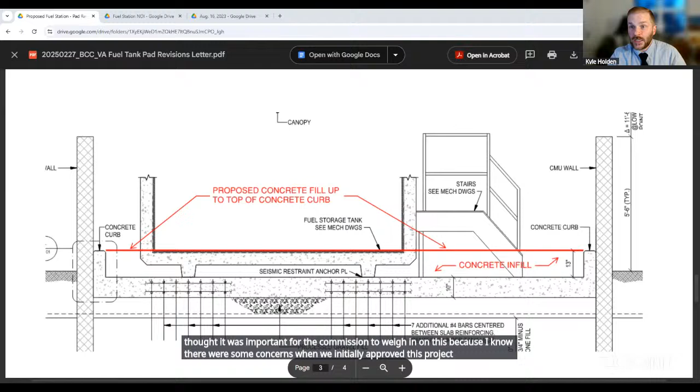So my last statement is, when Beta did their review, Beta was not reviewing really outside of that comment that Mr. Lynch mentioned at the beginning. Beta's not really reviewing to make sure that all the fuel handling regulations have been met. That's kind of beyond the scope of the review that Beta did for the commission. Apparently they did ask for some extra, the emergency shut off and things like that, and the sump was added in response to Beta's comments. But I thought it was important for the commission to weigh in on this, because there were some concerns when we initially approved this project because of the proximity of the fuel tanks to the wetland resource area. That's all I've got for now.

You said it is within the buffer zone. Do you know how? I've got the plan of record here. Are you able to see this plan as I'm scrolling through? The wetland is down here marked by these triangle flags. We have the 25-foot, 50-foot buffer zone. This is where the fuel tank is, so it lies between the 50 and 100-foot. The drive is between the fuel tank and the grass retention area, and there's a retention basin over here. There's 50 feet of buffer between the tank and the wetland.

Is there any concern—if that was a recessed area and there was concern about water filling it or gas getting in there—what's to prevent the water and gas from just sheet flowing off, since you don't have that sump area? That sump would be only for emergency spills, is my understanding. It's not designed to capture any gas from incidental leakage when you're filling your tank. This is kind of a catastrophic backup, is what the sump is for, is my understanding.

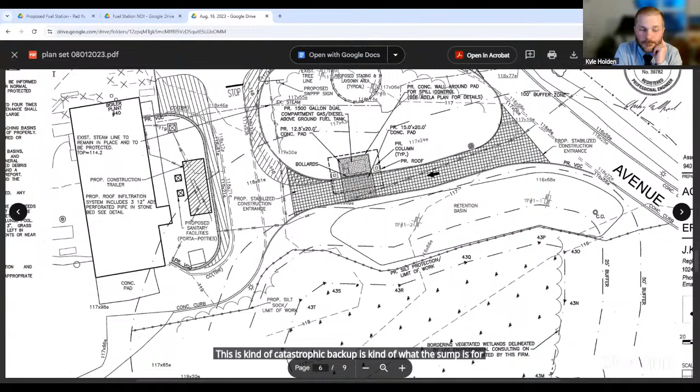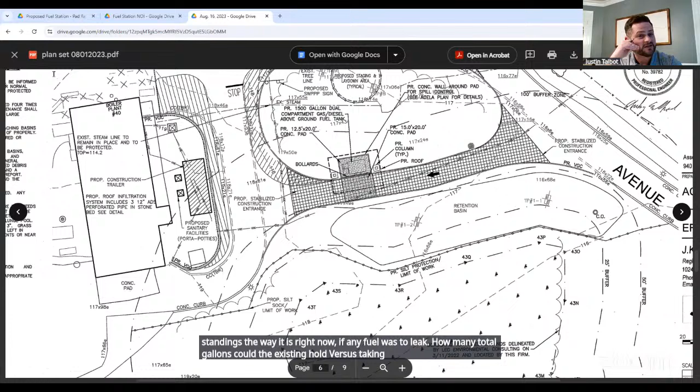Justin, you had your hand up? I did, Madam Chairman, if I may ask a few questions to Dawn. Dawn, in the current standing, the way it is right now, if any fuel was to leak, how many total gallons could the existing setup hold versus taking the other two 750-gallon tanks and putting them on your new proposed design with your grooves? How many gallons could that contain?

Well, it would contain anything that leaked. It's like having a container within a container. So let me ask the question: you have, let's say, 1,500 gallons between diesel and gas, and you have a 750-gallon leak. I'm assuming the current tank's catch basin isn't going to hold 750 gallons below the tank, right? I think the question is, what's the volume storage of the sump area that's being proposed to be filled with concrete? Correct, the sump area. Got it. Yes, that is designed to hold the entire contents of both fuel tanks, in total.

Then how about the volume—what would the volume be on the new proposed slab with your grooves? Well, minimal, it is strictly for small spills. The containment is a double wall tank, so if there was a hole or a breach of the inner tank, the outer tank would contain everything that's within that fuel tank. So what we're looking at is a secondary containment. Okay, understood. Thank you. You're welcome.

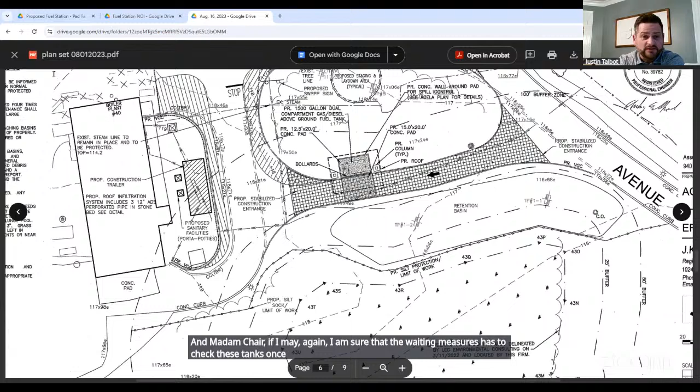Madam Chair, if I may, I am sure that weights and measures has to check these tanks once or twice a year. I am sure that weights and measures for the city has to go out and look at these tanks and confirm they're dispensing what they're supposed to be dispensing.

Mr. Lynch, do you know if, because it's a VA facility, the city would still go out? I don't know if the city would still go out, but I do know that there are monthly inspections on this internally from the VA.

I wanted to ask if the construction of the tank is something new that eliminates the need for the bathtub. Or was that bathtub standard years ago, and now it's not necessary because the newer construction of these gas tanks eliminates the need for it?

Yes, if it was not a dual walled tank, you would definitely need it. But we do have the containment of the secondary shell of the fuel tank.

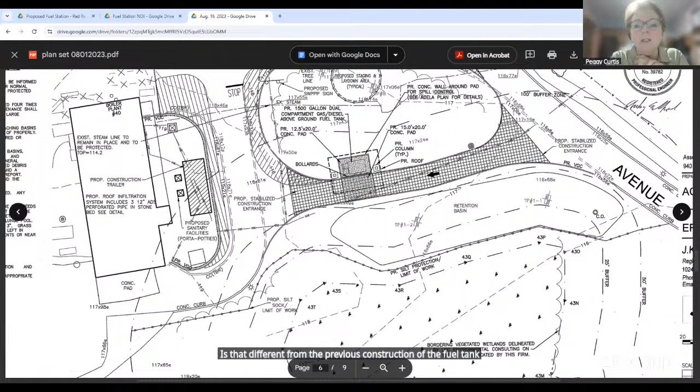Is that different from the previous construction of the fuel tanks that were existing? I can't really speak for that, but generally speaking, other fuel tanks are underground. It's not real often that you have an above ground fuel tank.

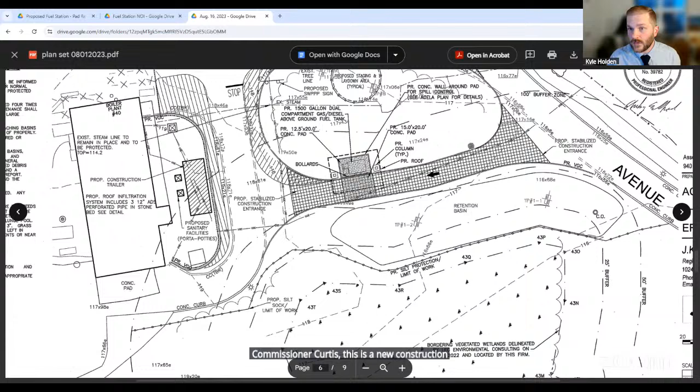Commissioner Curtis, this is new construction, so there weren't existing tanks at this site. Oh, yes, okay, I'm sorry, I think I mistook your question. Actually, there were some underground fuel tanks here that were removed and replaced with this. Thank you, yes, but they were underground.

Well, this is a commission matter, but not for a vote, so I'm not sure, Kyle. Yeah, so we were just hoping to get some guidance as to how the commission feels we should proceed with this. Even if we don't necessarily say the applicant needs to file an amended order, we can take a month, and now that we've seen this, if there's specific information the commission wants me to look into, I can certainly do that before next month's meeting. Or if the commission decides this is something we can just sign off on the certificate of compliance request, that's also fine. We just need to offer some guidance or decide on what additional information we would like to know as the commission, that I can work on before the April meeting.

Well, I'd like to know how long it takes to fill it and when is the optimal time to do it. You mean as far as filling the bathtub with concrete? Yes.

Mr. Lynch may have something to say. Well, this project is under construction right now, and the contractor is looking to do it as soon as possible. And just to clarify the point, the tanks and that sump have already been installed per the approved design. They've noticed some issues with that, and they're looking to maybe just fill that void space with concrete now. So everything's already in place, is my understanding.

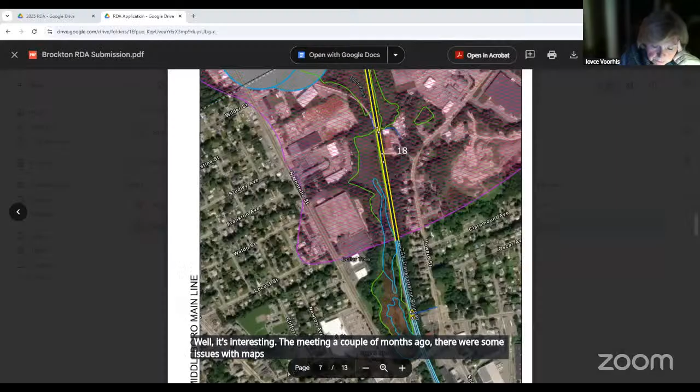Let's just talk through these maps very briefly. What you see here is the Avon town line at the north side. This is a color-coded map. The rail line is this set of parallel lines going north-south, top to bottom through the page. They have various color coding corresponding to different types of treatment based on how sensitive that area is in terms of proximity to protected resource areas.

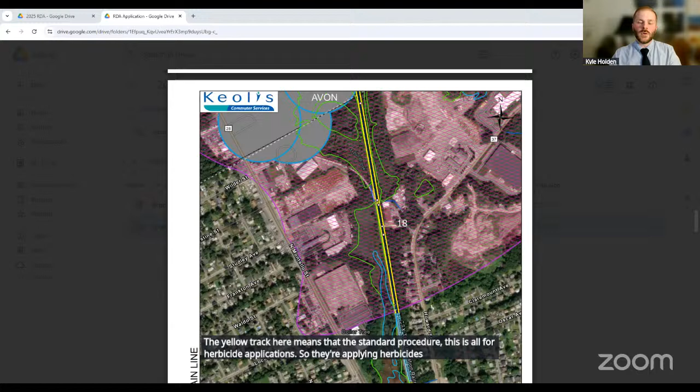There's a key at the bottom of each map so we can look at what those colors mean. In general, the yellow track means standard procedure—this is all for herbicide application. They're applying herbicides both to the rail line and the riprap that constitutes the foundation of that rail line, and also along the side to keep vegetation at bay. The area in yellow has a lot of other colors happening too, meaning there's a lot going on with wetlands and open water bodies and things like that.

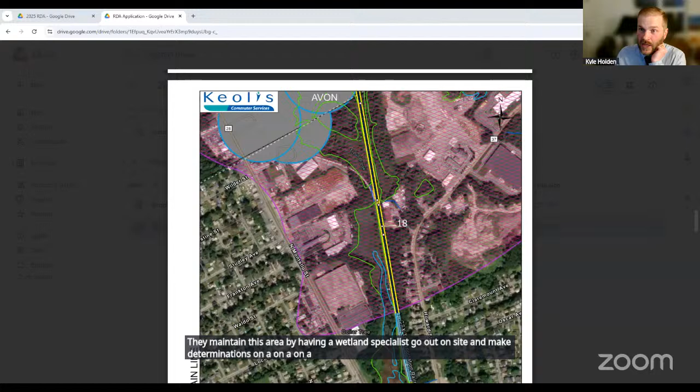This pink hatched area means that this area is significant to drinking water or groundwater. Anything within this area is yellow, meaning there is no herbicide application in that area at all. They maintain this area by having a wetland specialist go out on site and make determinations on a plant by plant, case by case basis. So this is the least amount of treatment. This yellow is the most restrictive as far as what's allowed in that area.

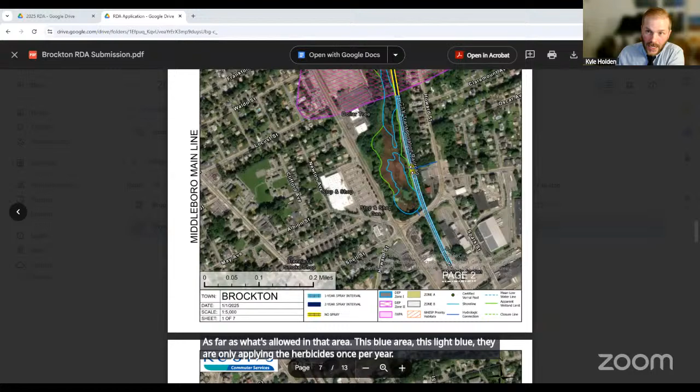This light blue area is where they are only applying the herbicides once per year. Areas farther down, I'm just going to scroll through several maps so we can see some different things. This segment of the rail has no color coding, meaning they just do the standard application through this whole section. It just kind of continues. We're just going south through the city now.

This is a waterway, open water, and it crosses the rail line. You'll see here there's a section right around where the track goes over that water body where there are no herbicide applications permitted. But on either side, they have a less frequently applied area, kind of in the buffer area.

There were some things I noted, and I included this in my agent report, on maps 6 and 7. There are two areas I noted where there seems to be an open water body that crosses the rail line, but it didn't have that yellow area. I spoke to Matt about this on Monday, and he said this is pretty standard when there's a culvert that conveys the water underneath the line.

So there's no actual open water at this point on the rail line. They have the limited application once yearly, but they don't have that yellow no-herbicide-applied-at-all designation because there's no open water. It's standard procedure for them: if there is open water within 22 feet of either side of the line, they don't apply those herbicides in the area. That's a yellow area.

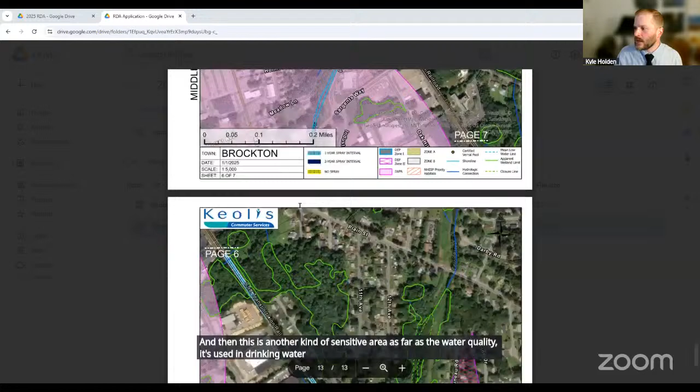Then this is another kind of sensitive area as far as water quality, used in drinking water or sensitive things like that. There are a couple other things here on map 7 where there are some water conveyances that are also culverted, so they don't have that no-application treatment there.

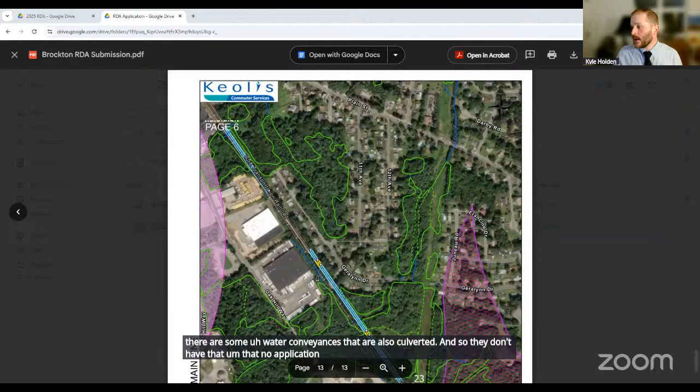This area at the very end, which is not even in Brockton but in West Bridgewater, this dark navy is a more limited restriction of application time. So the light blue is once a year, and then the blue down here is only once every two years. So it's a little bit more restrictive.

But yeah, these are the same maps that were approved last time, in 2020. So I'm comfortable issuing the determination, issuing a 2A, confirming a positive 2A, confirming the maps, and then a negative 5, which would state that the proposed work is exempt under the act. This RDA would be valid for 5 years, so they would come back to the commission in 2030.

Commissioners, any comments or questions? Did you mean 2020, not 2000, when you said the maps were from? You meant these ones are the ones from 2020, not 2000 — misspoke? Okay, these are the maps that were confirmed in 2020. That is correct — 5 years ago, not 25 years ago.

Do you know if the maps confirmed in 2020 are based off of maps from 2015, or is there a review between the 2015 and 2020 maps? I'm not sure when the last review was. A lot of these data layers are based on... I'm not sure how often they're updated, but the maps we have now are the same ones approved in 2020.

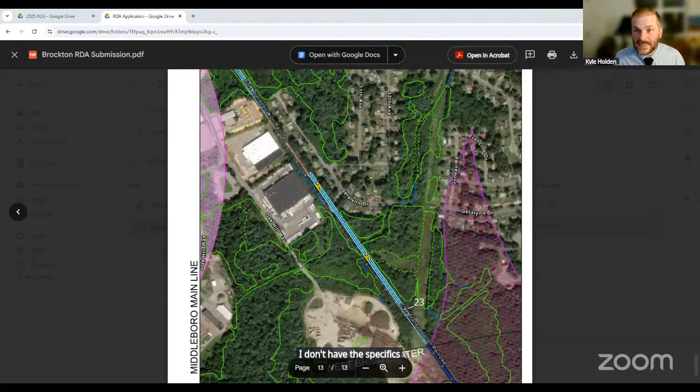What kind of herbicide is being used? I don't have the specifics on the specific chemical that's being applied. It may be buried in the narrative, but it's not something I remember offhand. Don't recall seeing it.

And then just another comment — they've got to apply these herbicides using best management practices as well. So there's a whole subset of regulations that they have to abide by in order to meet that exempt status. There are all sorts of regulations they have to maintain and abide by to be considered an exempt activity.

And you mentioned they've already gone, or are going, before other commissions. Yeah, I think that's why Mr. Donovan had to leave a little early today. He had another commission meeting at 7:30 this evening. So I think he just left because he's attending several of these, not because of a technical issue.

I thought I heard mention of a rain garden along the way. It really was surprising to me to see how much wetland there really is along the way. And it's comforting to know that they take those additional steps.

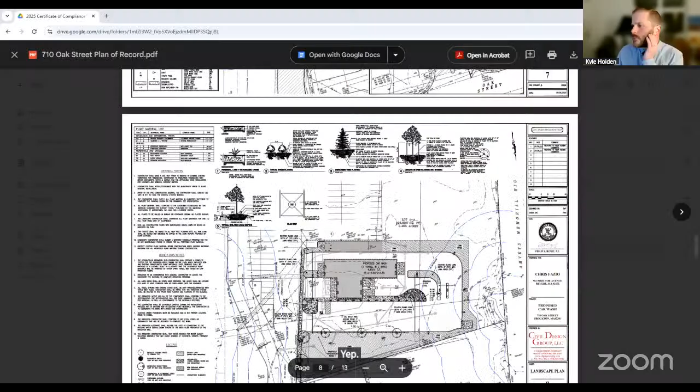Okay, I'm looking at page 8. This is the landscape plan.

So this is the plan of record, and the car wash is in this portion of the lot. The entire lot for the property is actually this much larger trapezoid shape over here, and the car wash is only in a small section of it. This is an existing parking lot that is remaining in place.

And then this is kind of a meadow grass area, kind of weedy, that was open before. This is where the car wash was installed. There's a retention basin down here.

The limit of work is where the erosion controls were installed around the perimeter of the work site, and that's this dashed line here. It goes up to this corner, cuts down here, and circles around this portion, which is where the dumpster goes.

I like this map because it also shows the pre-existing elevations of the site. That's what these lines are through the parking area. This is just the approved plan set.

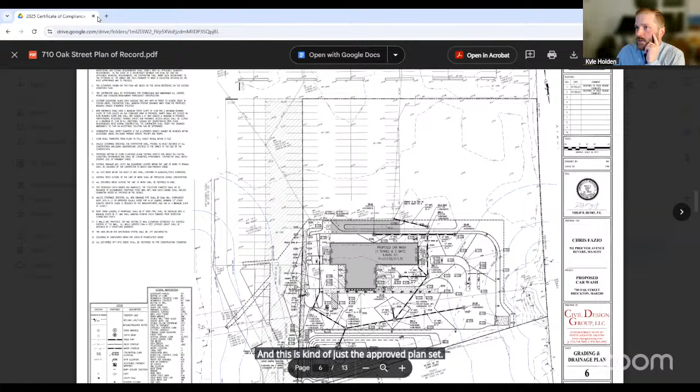I'm going to pull up... very quickly, can you—I can't see, must be my old eyes—but do you have any idea what the elevation is right smack in the middle there? You mean right here? Yeah. That's 213. Okay, and it's fairly flat.

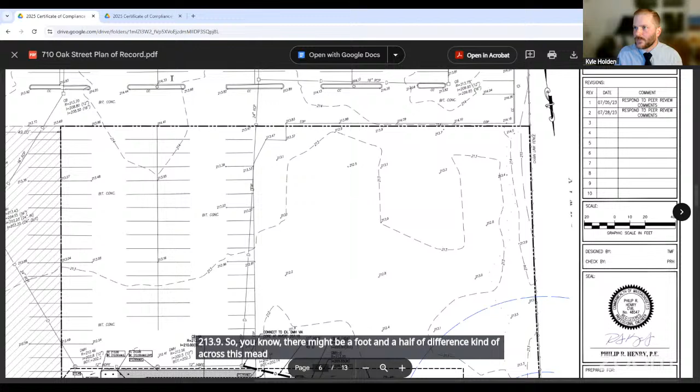This is the meadow area. I've got 213.1, 212, 213.9, so there might be a foot and a half of difference across this meadow, but it's a fairly flat surface. I am going to pull up the as-built, and then we'll look at some site photos.

So here's the as-built, and I don't really have any problem with it, outside of the grass needing some more time to get established, within the confines of the area where the work was done around the car wash, as far as work within the limit of work.

But the thing I noted when I was out on the site is that this portion of the site, this meadow, has had significant grading changes. A lot of fill has been added. The topography of this meadow has been altered significantly, including—you'll see here.

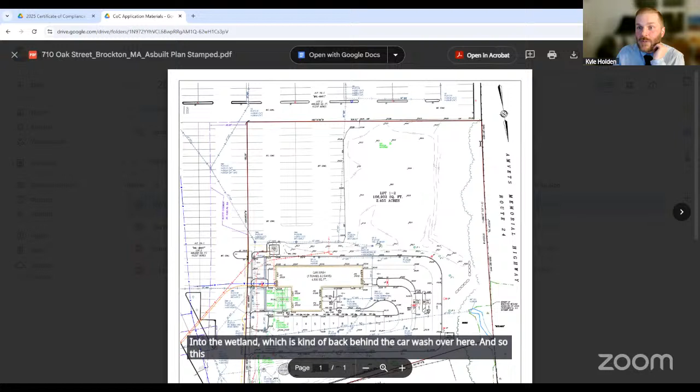There are two swales up against the wooded lot line here, like a water conveyance, almost like a channel that's been dug through here, which looks designed to deposit any runoff from this portion of the property into the wetland behind the car wash. This modification was not reviewed or approved by the commission and does not appear on the plan of record.

If there were plan revisions after the order of conditions was issued, the commission never reviewed or approved this work. So this work is in violation of the order of conditions.

I've got some site photos that I can share as well, just to give you a better idea of what things look like out there. Let's see.

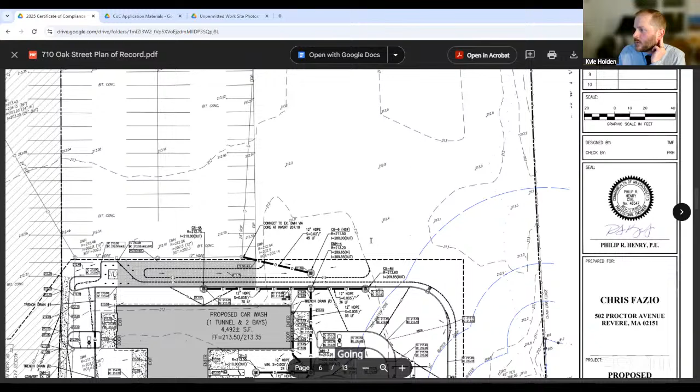Going briefly back to the plan of record: from that photo we were just looking at, I was standing around this portion, looking directly down the back of this, where the curbing would be. And you can see there are some lights here.

So the point is, you can see that the limit of work approved on the plan of record is just several feet behind where that curbing was installed, whereas we have obvious disturbance dozens of feet back into the wetlands, just behind these rocks. So anything behind probably where these trees had been planted is also beyond the approved limit of work. That's the concern — a lot of work was done outside of what the commission had expected based upon the plans they had approved.

We never received word from the applicant at any point that they were doing work beyond the limit of work, which was marked by those erosion controls that were installed. Obviously, they're not installed anymore. At the pre-construction meeting, I walked the perimeter and confirmed those erosion controls were in place and approximately in the right location. So I'm not sure at what point work was done beyond that limit, but it's clear that work has been done.

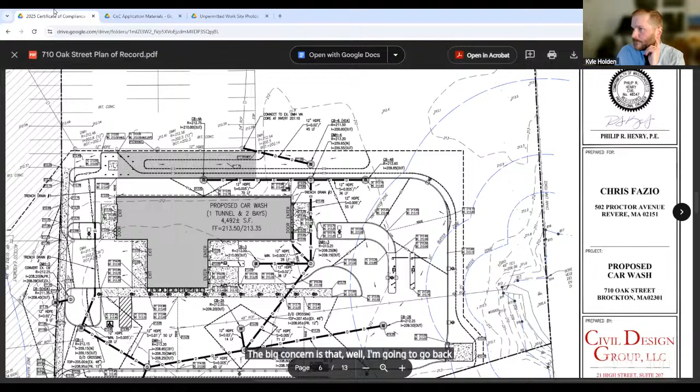The big concern is — I'm going to go back to this. Here's the site plan, the approved site plan. You can see a majority of the area that's been disturbed is not within jurisdiction — it's outside of the 100-foot buffer zone, which is this line here.

But the concern is with that channel that's been installed — really, any water that's collecting through. Keep in mind, to the north above this shot is the entire parking lot for Walmart. It's got drainage, catch basins and things there. But any water that sheet flows off that Walmart parking lot, or off this portion of the parking lot and ends up here, will be conveyed down directly into that wetland.

That stormwater management was never reviewed by the commission, even though we did review the project for stormwater compliance with the stormwater standards. We only reviewed the work that was proposed and approved within the limit of work, just within this portion of the site.

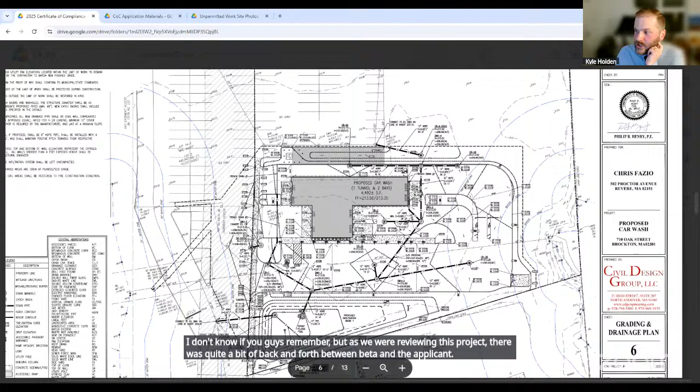I don't know if you guys remember, but as we were reviewing this project, there was quite a bit of back and forth between Beta and the applicant, trying to make sure this basin would meet the performance standards. And now we have just kind of an unpermitted outlet into the wetland, and I'm not sure what capacity that's designed for. If it is designed, does it meet the standards or not? We just don't know.

So at this point, I'm not recommending that the commission issue the certificate of compliance due to the unpermitted changes beyond the limit of work. In addition, the commission needs to decide how we want to approach and rectify this situation. So, yes, Madam Chair, you have your hand raised.

I just have a very quick question — can you place on this map the approximate location of those boulders?

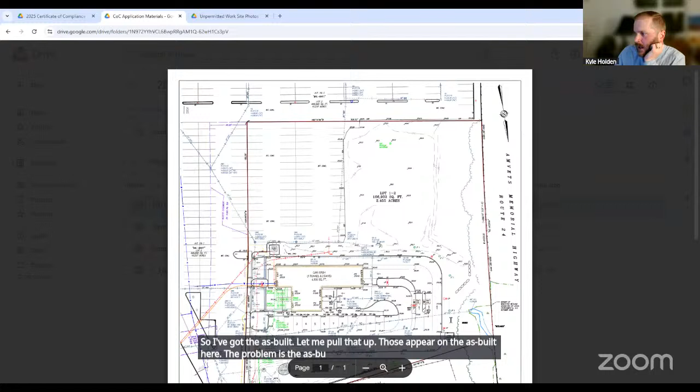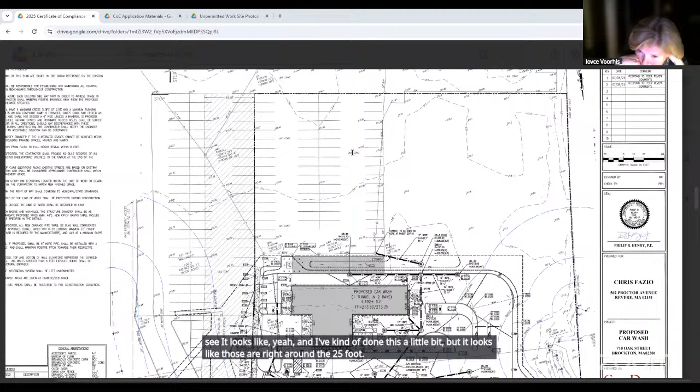So I've got the as-built, let me pull that up. Those appear on the as-built here. The problem is the as-built doesn't have the buffer zones on it, so it would be beneficial if we had that. It looked like, on the plan prior to that, it was within the 50, or within the 25 — I can flip back and forth. You can kind of see, really close, look where the 25 is. It looks like, yeah, I've kind of done this a little, but it looks like those are right around the 25-foot area. But again, we don't have that confirmed.

That conveyance is certainly within the buffer zone. Going back to the as-built here, the 50-foot or the 100-foot line kind of goes right through here. So again, a lot of that fill is placed outside of the buffer zone. That's not a problem in and of itself, but it appears this is designed to convey any water that collects here through this channel into the wetland, and that's the concern.

In my agent report, I recommended two possible solutions for the commission to consider. One is that the applicant, since this does look like it was designed on some level, could provide documentation showing this modification meets local and state stormwater standards. If they think they can demonstrate that, the commission can have one of their third-party consultants review it and confirm compliance with those standards.

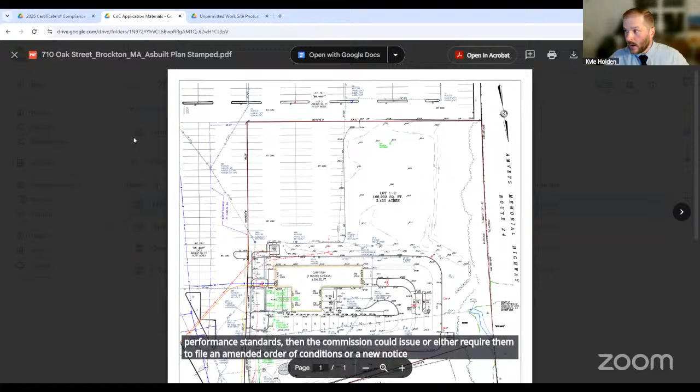If these unpermitted modifications do meet performance standards, the commission could require them to file an amended order of conditions or a new notice of intent for the work on this portion of the site. After that's resolved, they could come back and apply for a certificate of compliance for the car wash.

The second option is: we have the existing conditions map here, which is part of the approved plan set and has elevations. The commission could require that everything outside of the approved limit of work be returned to its original conditions as depicted on this existing conditions plan. Obviously the car wash wasn't existing, but the elevations outside the limit of work are the existing conditions.

The commission could require that all areas outside of the limit of work be returned to pre-existing conditions, and then all that area would be seeded with some sort of conservation mix just to stabilize it, because right now it's very bare. So that's kind of where we are.

If Mr. Clark wants to speak to this through the chair, I'm sure he'd like the opportunity. So that would entail submitting a remediation plan, is that correct? Yes, we would want to have something there. We would need more erosion controls at minimum put in before any more grading and earthwork around there. But yeah, that's kind of where we are.

Because this work was done outside of the limit of work, I think an enforcement order is something I would recommend. We can issue that this month. We can talk about it first and figure out how we want to manage this, but this is significant enough that I think an enforcement order is warranted.

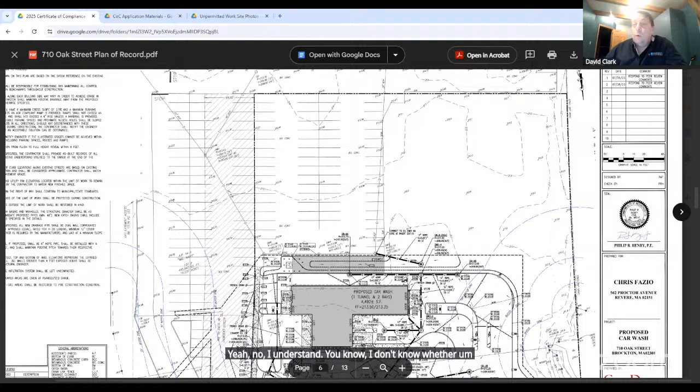Mr. Clark? Yeah, no, I understand. I don't know where it went south as far as the permitting went. I'm the general contractor working on the project. I'm certainly going to reach out to the owner and engineer who I thought was going to be involved in this, but I'll definitely find out why I received, as part of my building set, a plan that wasn't approved by your commission.

We'll certainly do whatever it takes. It was designed on our plan - it says it's a peer reviewed planning board revision, to respond to peer review comments and planning board conditions. Not to make an excuse, and you're going to do what you got to do as far as putting an order out there, but I think we can hopefully get the engineer to show why that was designed like that. That was a rather large addition of work for us, so I certainly wouldn't have endeavored to do that if it wasn't the case.

And just so you know, really the boulders were not part of that design. We were having a lot of problems on that site with trucks backing down and dumping on that site.

It's a pretty notorious dump site up there. We had to remove quite a bit of materials that we weren't planning on running into up there. So that was the purpose of the rocks, because people were backing all the way up to the wetlands back there.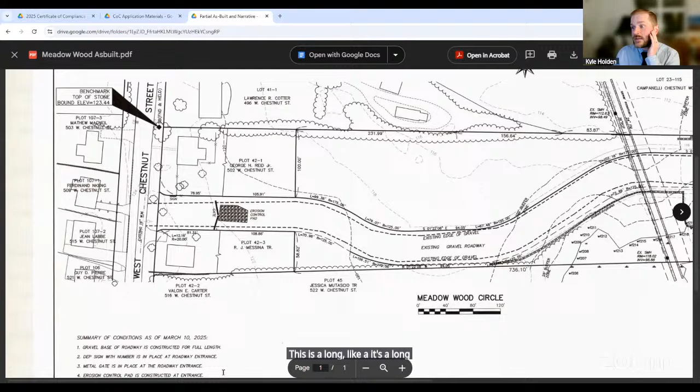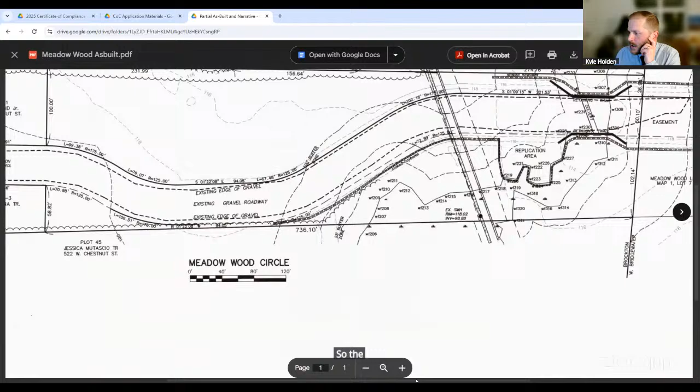I'll open up the submitted as-built and the project narrative. So, let's see here. All right, in the notice of violation letter—you know, this is a physically long site. The wetland delineation, the wetlands are kind of... I'm not even sure what cardinal direction this is, but it looks like the south portion of the site. So the wetlands are all the way over here. Again, this is the as-built that was submitted to the commission.

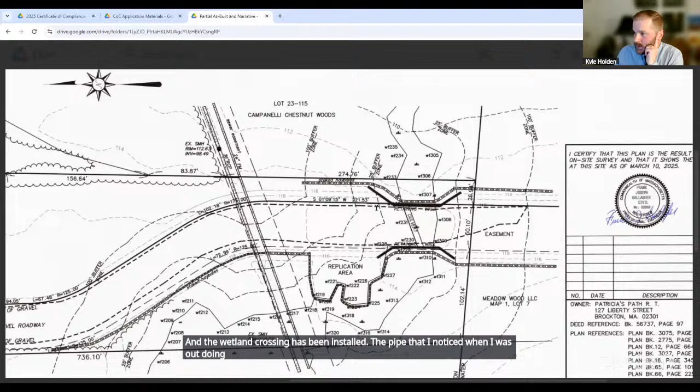The order of conditions was for the installation of a wetland crossing, which is what you see here. Because there was direct impact on the wetland resource area, there's a wetland replication area over in this portion of the site that has been planted, and the wetland crossing has been installed. The pipe I noticed during my site visit is on this portion of the wing wall of the wetland crossing, and it does not appear on the as-built plan. So in our notice of violation letter, I asked the applicant and Frank, the engineer on the project, to give special attention to that pipe and what it's connected to, if anything, and to give us a rundown of why it was installed.

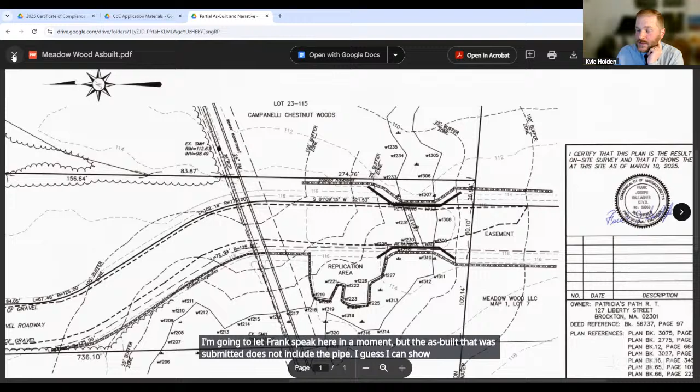I'm going to let Frank speak in a moment, but the as-built that was submitted does not include the pipe. I can show some photos I took when I was out on the site—these were taken on January 3rd of this year, 2025. This is the wetland replication area. You can see some standing water back here, but it's been seeded, and there are trees and things planted through here. Here's another shot of the wetland replication.

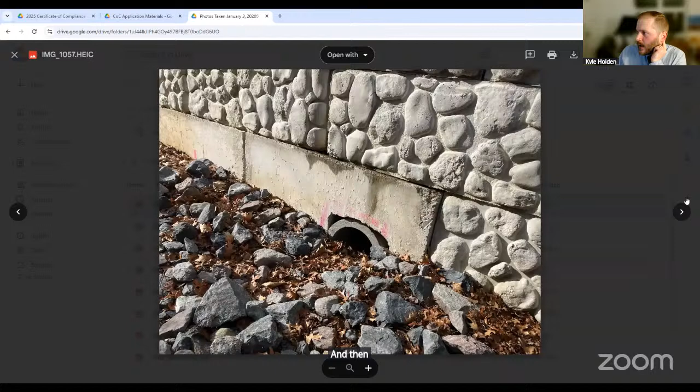This is the pipe in question—there's a pipe here, some riprap outside the pipe, and this is in that wing wall. Here's another shot: the pipe is here, and that's the wing wall. This is the box culvert. So I guess that's really it—the pipe's there, this is the wetland crossing, looking back towards West Chestnut Street all the way over here. Is the box culvert under the crossing? Yeah, the box culvert connects the left side of this image to the right side.

So anyway, the commission's concern is: what is this pipe? What's it connected to? Why was it installed? Because it did not appear on the plan of record. That's kind of where we are now. Through the chair, Madam Chair, I'll throw it back to you, and you can ask questions of myself or Mr. Gallagher. Mr. Gallagher? Yes.

Well, let me just say, before I start, I'm out of state, and I'm not in my office. I don't have access to anything that relates to this.

I know at Kyle's request and at the commission's request, I did do this as-built. It's, I guess, my fault that pipe wasn't shown. I guess maybe I didn't give enough attention to detail on that, but I have spoken to the contractor who did this work. Right now, as it stands, that pipe is not connected to anything. It's just basically a stub of pipe that goes through the wing wall, and that's it. It's buried, not connected to any kind of stormwater system at this point.

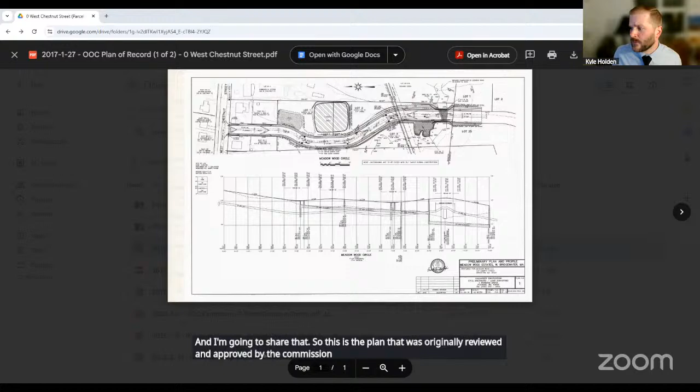So at this point, Frank, I know that you do have catch basins on this plan. Obviously they haven't been installed, and they won't be installed until and unless you get planning board approval to install a constructed roadway. Is that correct? Well, it may, I would say, well, there's some dispute about that. Let me put it this way.

This roadway, as it's laid out and shown on this plan, actually received an approval under the city's site plan review process. It didn't receive an approval under the subdivision process, but it was submitted as an access road under and reviewed under site plan approval, and it did receive an approval by the planning board, but not as a subdivision, just as site plan approval.

So let me rephrase that. At the current standing, you are not permitted to install a roadway here. Is that correct? Well, I'm going to speak just as the engineer. There's a legal argument that I'm not prepared to make. Sure, and I don't want to put you on the spot necessarily.